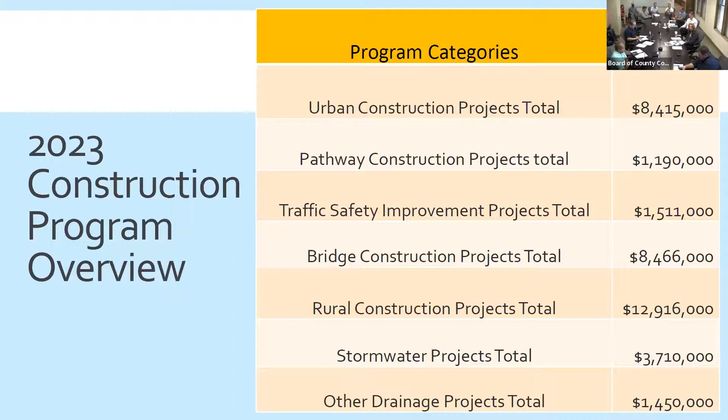This is our major construction projects. You can see Bigelow Gulch there at the top of the list. We're a little excited to get the last phase going and get the corridor completed, a project we've been working on for a very long time. The other bigger projects, we have the West Terrace Stormwater project that's going out right now, slated to start work on the first phase next week on Monday, the 17th. That number is the actual construction amount for that phase. There's different numbers, some include all the right-of-way dollars and everything else, but that's just strictly the construction number. You can see the Little Spokane Bridge is also going out next year, along with Brooks Road, Euclid Road Bridge, which we hope to get going on very soon. We're just working through a lot of the permitting with BNSF. Then some other preservation and a roundabout project up on 57th are kind of the highlights for next year. Next slide.

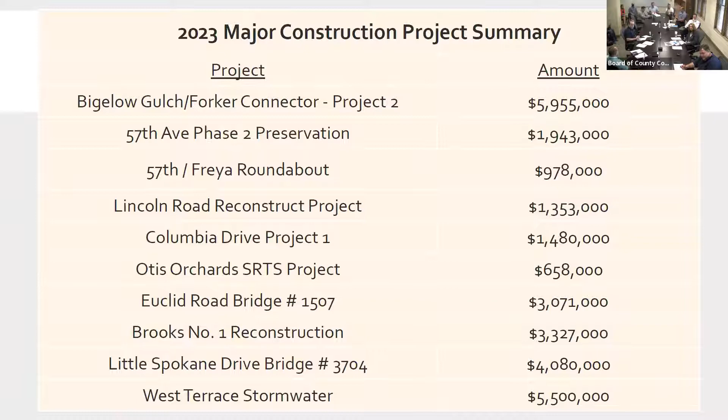Now we'll get into a little more detail on some of the projects. This is Bigelow Phase 2. It's on the west end connecting into our Bigelow Phase 1 project, very near the city limits down at Francis. On the east end, it ties in at Weile and the current Bigelow Gulch project. We're straightening out a lot of curves and fixing a lot of elevation changes through there. It'll be a very welcome change, making that corridor much quicker and safer for people to be traveling. Next slide.

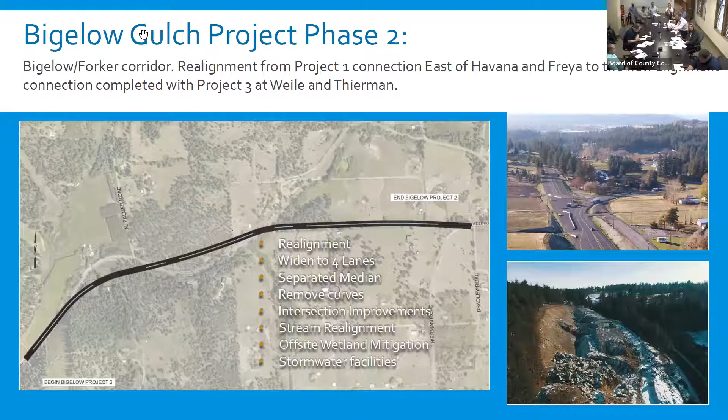This is the breakout of the funding and also our anticipated schedule for the project. You can see we have funding from a bunch of different sources, and the one thing I'd like to point out is we only have 1.1 million of county dollars out of a total project cost of 15 million.

This is what Kyle was talking about. We had a lot of right-of-way costs and a lot of other costs associated with this project, so it's a pretty good sized project. Construction's pretty good size too.

So the schedule down below, you can see we're trying to get our documents out and go to bid in early January, with an anticipated construction start in the spring, and then we'd like to have it open to traffic in 2024 as the goal.

I just wanted to add a few details to that. We are going to have that out early to go next year, but we're still doing a big analysis on the sequence of work and the total allotment of days for that project, trying to consider all the impacts beyond just building the roadway to the neighborhood down there and the wetlands restoration and reconstruction.

Looking at exactly when we shut down the current portion of road to begin that reconstruction is something we're looking at. There's so much other work to be done. We're just trying to minimize the total duration that road is out of service, because 2 years is a long time to have that completely off, which would drive a lot of traffic to some of the neighboring north-south streets. So it's possible we don't even hit the major realignment until '24 and do all of the ancillary work in '23, so that we're ready to just build and have it only shut down for one season.

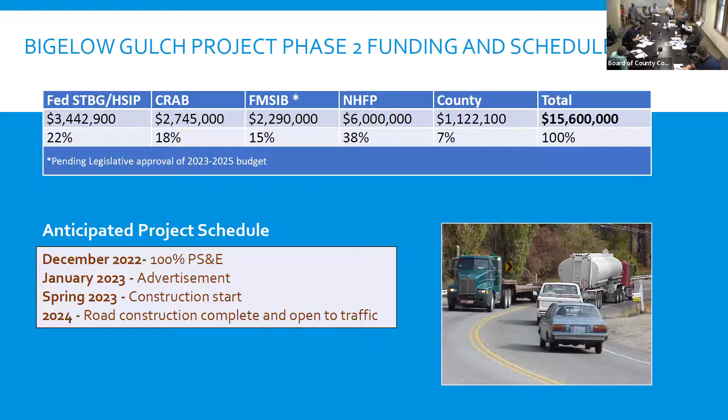There's a lot of offline work that can be done on that project without actually closing the existing Bigelow to traffic, and obviously that's in everybody's best interest to minimize the amount of inconvenience. So we'll see, more to come on that. All right, next slide please.

You can see there the TIB portion of it and the county portion. We're about 20% of that project in terms of construction dollars. And again, that's a spring ad, and then also hoping to have that open to traffic by fall if possible. Next slide.

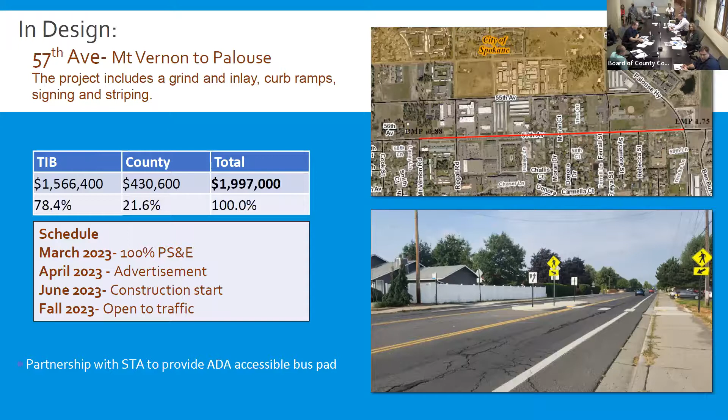And this is just the roundabout I was alluding to. Again, you can see that the construction schedule matches up with the 57th Avenue preservation project, just trying to get it all done at once so we don't have to inconvenience people more than we are already going to be doing.

On the dollars, you can see that's a CMAQ grant, an air quality grant that we got. And you can see that we were 40% in that one, so a little more than usual, but it's a good project. We're excited about it.

There is a right-of-way that's ongoing right now. The only property we needed to acquire was at the northeast corner there from a church, and we've been meeting with their board and having conversations with them. So hoping to get that right-of-way soon, since there's only one owner we have to talk to. But more to come - we actually own the southeast corner, and then we're staying off the western parcels by moving the roundabout to the east a little bit.

So is it just stop signs for the north-south traffic then? Yep, it's a through movement for east-west and stopped north-south, and the volumes are growing.

With different activities and attractions, the aquatic park to the south on Freya, we're getting a lot more pedestrian activity and a lot more just general traffic on Freya.

And this will also kind of marry up well with the city's project. They're putting a roundabout also where they have a grant, and I'm not sure if they've acquired it yet, but up at Palouse Highway and Freya. So this will all kind of make that area come together nicely and be a much better improvement for traffic overall.

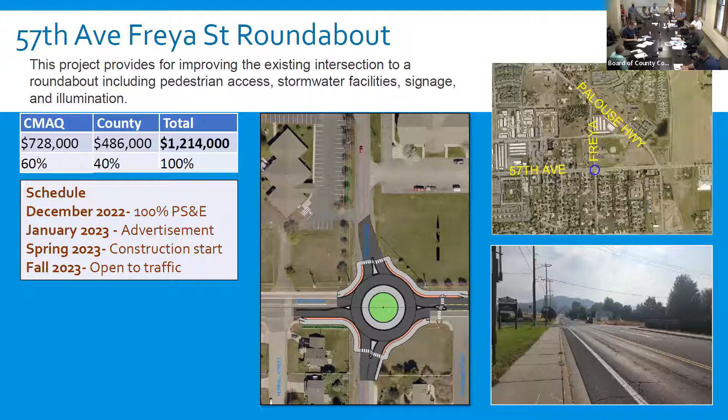You can see, because it was a take it or leave it type project, and we wanted it done. We really need to do something with Lincoln anyway. We were going to be out there doing preservation work, so why not get the improvement for roughly the same dollars on our end? So we're happy to get that one.

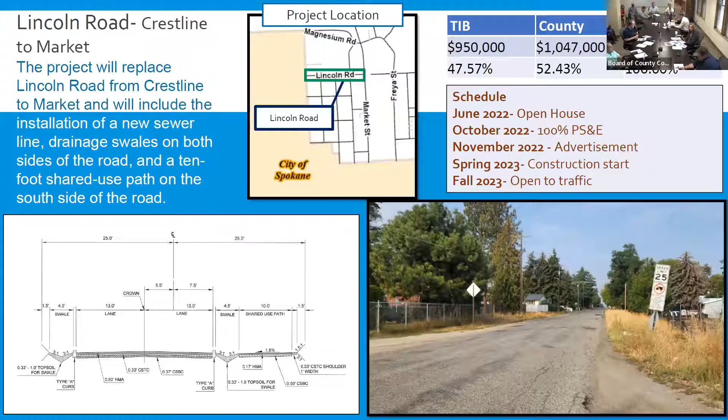And Columbia Drive, we're calling this Project 1—it's actually the second project. If you're familiar with Columbia, it goes through the Northwood neighborhood. We had built the eastern portion from Argonne over to Northwood, and now we're going to be doing the other portion of it from Northwood back to where the new neighborhood took off. I'm not sure what street we'd call that exactly.

You can see it, it's a red line on the map there. Again, I'm going to get this out in the spring and hoping to have it built next year. There are some mild traffic calming improvements we're making, similar to the previous phase—some curbed islands you can see in the cross section below. They just occur at a few locations, trying to slow traffic down.

We've heard from the neighborhood up there that people tend to really move through—it's a very wide roadway now. We put in striping and that helps, but I think the channelization will also serve to slow folks down a little bit. Kind of an interesting thing.

We've heard from people that the really rough road conditions that exist do help calm traffic, so they're concerned that when we repave it, people are going to drive even faster. And I don't actually doubt that, I mean we see that. So hopefully with the improvements we'll offset the new asphalt effect of people driving quickly, and that'll be a good improvement for the neighborhood in there.

That'll complete all the asphalt clear from Thierman all the way to Argonne, so it'll be a pretty good roadway at that point for us. That's all county dollars—this was actually shift money that we got from the board. So we're excited to do that project.

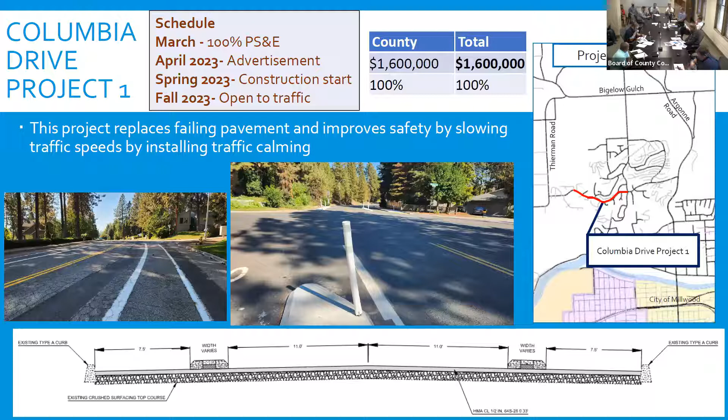That'll be a really good one that never fared very well in the grants world, because of the classification of road—the overall traffic doesn't compare to our larger arterials—but still a really good project. Happy to have it. Next slide.

We did get some money. You can see a 92% grant from Safe Routes to School for Otis Orchards. This is a crossing project right by a school, and you can see we're adding flashing beacons, narrowing the crossing by doing some bulb outs. We'll also have this one going out next year, and obviously want it open before school starts.

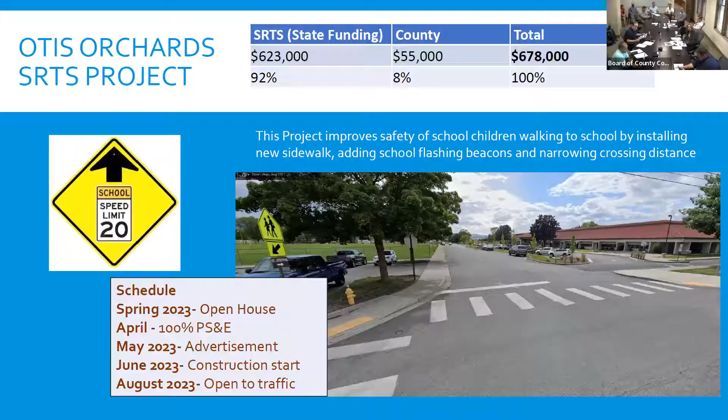This is just a diagram showing what they're proposing. You can see along the north side of Wellesley there, we're doing the pathway, and then you can see the bulb outs at the intersection there in front of the school with the new crossings and the beacons.

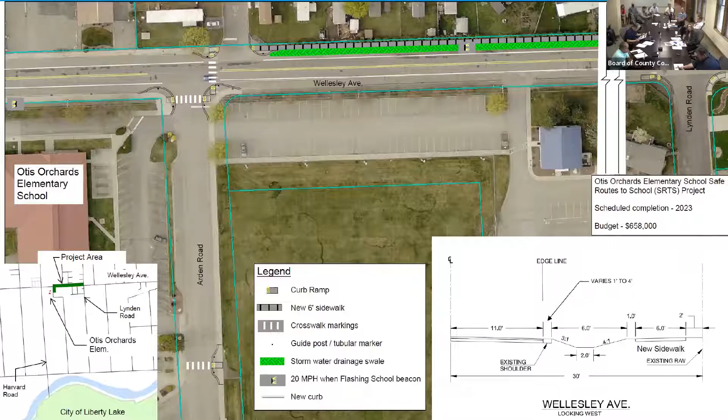Euclid Road Bridge. I think we've all heard plenty about this one. We're really happy to have it underway and like it going as soon as possible. We've been leaning on the railroad as much as you can lean on a railroad, and hope to be underway soon. We've been getting favorable comments back, so that's one we'll keep pushing on and hoping to have it done fall 2023 and open to traffic. We're anticipating maybe having around $1 million in county money in there, depending on how construction goes. And then we have the 2.6 from Burlington.

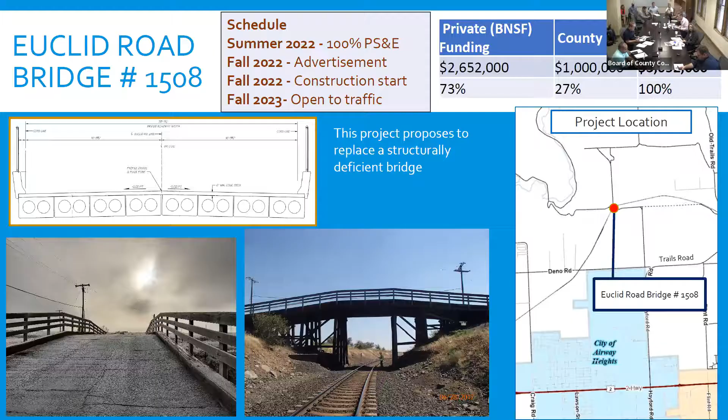Brooks Road. This is a reconstruction project for us. You can see we got the STP money in there for roughly half of it, RAP for roughly a quarter, and then about only 15% county dollars.

If you're familiar with Brooks Road, it's a really good connection from Highway 2 down to Medical Lake. We have two phases of this. Due to funding, they're going at different times, but we're going to build this southern portion next year and have it open in the fall. That'll be a really good project. It's a very narrow rural road and really in need of something being done, so the preservation work along with the widening work will be a really big improvement. It'll open it up for other folks too that want to use it for walking and biking. I could see there might be that need if there were actually the facilities available to people.

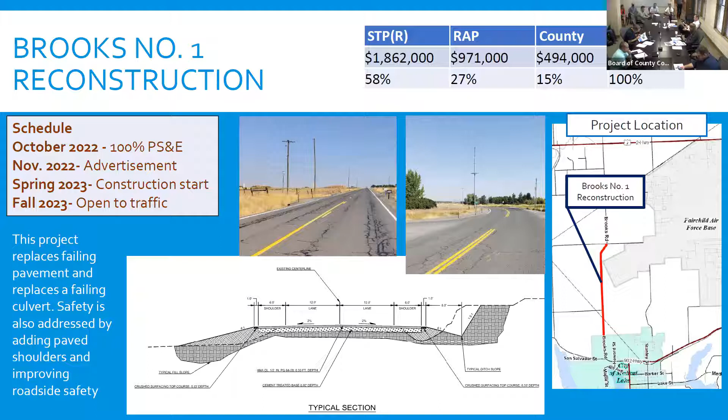Little Spokane Drive Bridge. If you're familiar with Little Spokane up there, this is the piece going out to Woolard, and it's due. This is federally funded—you can see 72% federal contribution on that. Again, we're hoping to have this open by the end of construction season next year.

The only challenge with this one is the detour route is relatively significant and could also conflict with what WSDOT has going on. They're doing some intersection safety improvements too, so we're coordinating closely with them to try and minimize the inconvenience to the public, and see if there's any opportunity for timing ours. We don't know that there is. We have certain windows we have to work in, so we're somewhat restricted, but at least we'll explore the opportunity and see if we can.

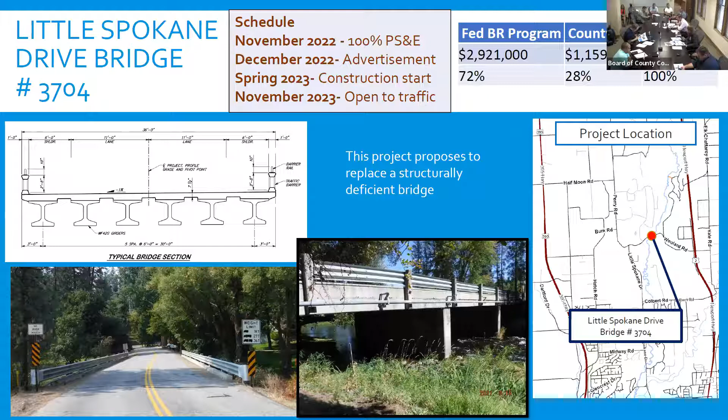As we discussed, this is our West Terrace Stormwater project. Phase one of it is putting in the big main from Hayford and Arrow and moving it south to get down towards the neighborhood we're trying to pick up. That's going to be underway starting next week, and we'll see how far they get. If it keeps being summer forever, they'll probably get quite a ways. If winter actually shows up, then they will have to shut down for the winter, but at least we'll start making some headway on it and breaking ground.

That'll be a really good improvement. The line we're putting in has capacity anticipated not just for what's going on now, but also to facilitate future growth in the area. We all know in this area, the only real solution is to get the water out of the area and find some place to dispose of it, and this will facilitate that work.

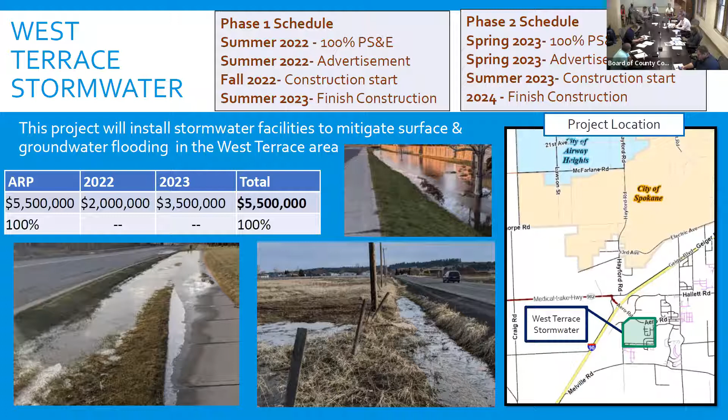We're happy to have this project, paid for primarily by ARP funding, so we're very appreciative of that. We do not have another funding source for stormwater projects like that. We can always find money for water quality improvements, typically through ecology, but not so much for conveyance projects like this one. So it was really, really good for us—we really appreciate that money.

So that was primarily focused on next year's program, the 2023 improvements. And we also have the 6-year plan. If you have an opportunity to look at it, I'd encourage you to do so. We have a lot of really good projects programmed going forward.

We're taking a look at other potential corridor projects with Bigelow getting to the end. We're looking broadly at the area to see if there's other corridor type projects that might be of interest. We don't know that there is. Our area has a lot of topographical challenges—you cross giant ravines, go up and down mountains, have wetlands and rivers. So other corridors like a northwest connector have a lot of challenges, but we're going to at least take a look and see if there's something worth pursuing. If we decide there's something worth looking at, we'll bring it to the board and get everybody's temperature on what they think might be worthwhile.

The other thing we always bear in mind is that it's a big drain on the program for an extended period of time to attack those corridor projects. So it's always a good conversation to make sure we're willing to commit to them for the long haul, because they can easily be 10, 15-year projects and detract from our ability to do other work—similar to what we've seen with WSDOT and the NSC not being able to do some of the other work they might like to be attacking. So we want to go into it with our eyes open and make sure there's support and that it's something we all want to pursue if there is one that makes sense. More to come on that—just foreshadowing at this point.

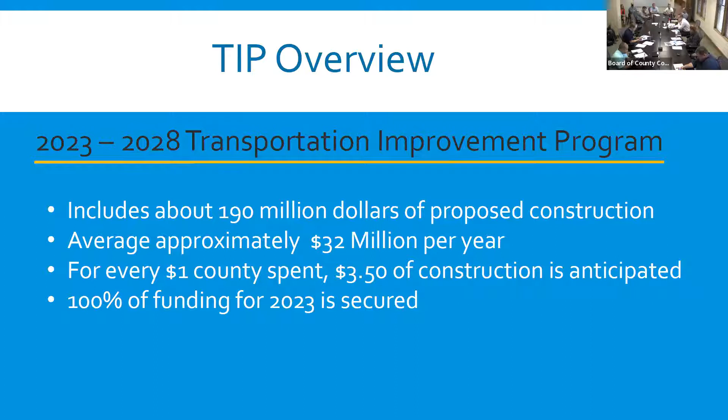Next slide. A little hard to see, but I wanted to show the board the geographical distribution by district of the projects—you can see they're kind of all over the map. This will be something we'll be looking at every year going forward, and I anticipate more interest in this. But it's been a really good year.

Our grants group, I just can't say enough good about them. They do a fantastic job of securing funds for us. That's Jamie Hayes and Barry Green, and they really are good at going out and finding the money and getting the grant applications all shined up, getting us the money we need to do the work. So really appreciative to that team for their efforts. And I think that's it.

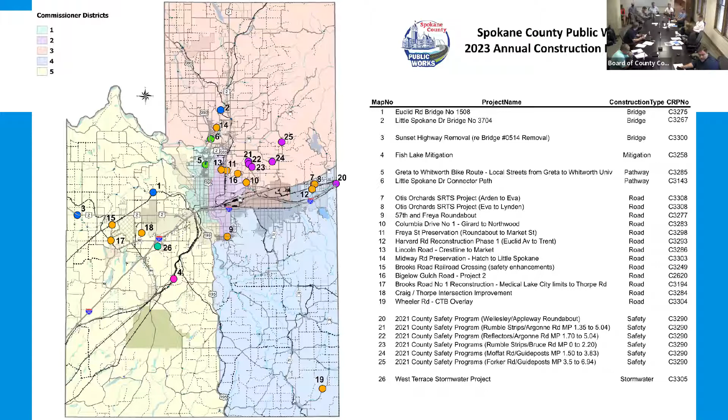Something that's gonna take us to Kirsten. That's great response. Got the chair warm. That's always nice. You wanna roll right into the next one? You gotta jump there, you only get so much time. Matt and Kyle, you guys gotta check, you're already using the 5-district map. It is the 2023 TIP. There you go. Already thinking ahead. It's funny, there's no dots in the middle.

Okay, so this is the other half of Public Works here, primarily on our wastewater system. Kristen is going to brief the 6-year CIP. Sounds good. Good morning, everybody. Our 6-year sewer CIP covers the wastewater collection system, Riverside Park Water Reclamation Facility, as well as our county water reclamation facility. So I'll briefly cover all 3 of those in this presentation.

Next slide. Starting out, I wanted to give you a brief overview of our wastewater collection system. These 2 maps are in the CIP—one is the valley, the NVI and SVI basins, and the other is the NSI basin, our north side. On those maps, starting with the valley, we have 2 major interceptors that run through the valley, the NVI on the north side and the SVI on the southern portion. Both collect throughout the valley and feed the Spokane County Regional Water Reclamation Facility, shown on the left, SCRWRF.

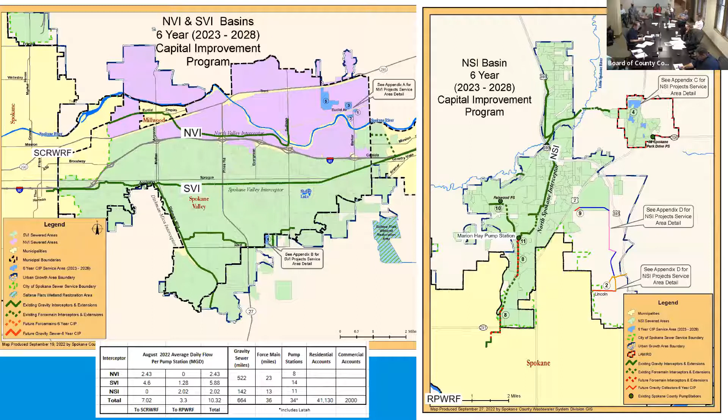Those are just kind of overviews of our system. We do see about 2 million gallons a day of flow from the north side of Spokane, another 2 million gallons a day from the North Valley Interceptor, and then about 4 million gallons a day from the South Valley Interceptor, just to give you an idea of the flows.

This is a summary from the CIP again of our wastewater system improvements. I'm going to touch on the projects that we have coming up in 23, 24, and 25 that are all highlighted as our first projects there in the CIP. Of interest, we have about $26 million of projects planned for the next 6 years covered in our CIP. That's both our capital improvement projects as well as our operation and maintenance projects associated with, for instance, like our pump stations.

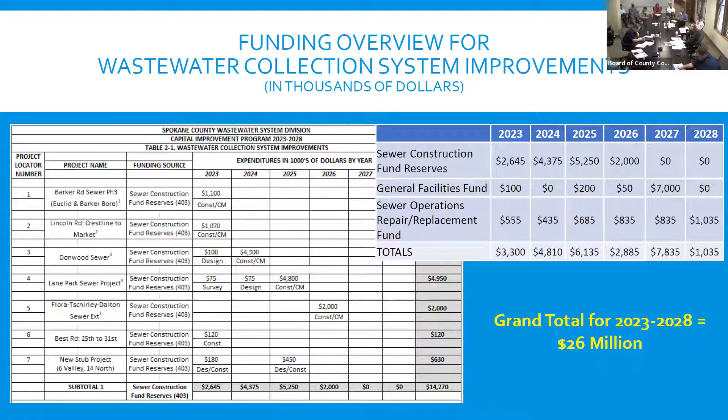These are projects in the valley. There are 3 upcoming projects in the Barker Road area. We will be coordinating all of them with the valley as they participate in the road portions of the projects and we do the sewer. This year, in 2023, we're going to finish out a project on Barker Road. In 2024, we're doing a sewer project, a continuation of our STEP program, septic tank elimination projects, where we're replacing septic tanks in Donwood, both in the north portion and south portion there, right adjacent to the river. And then further out in 2026, close to the new Amazon facility, is a project we'll do on Flora, Tschirley and Dalton to provide sewer to that area, which in essence will complete sewering the northeast industrial area, as the valley calls it.

Now I'm going to give you a few more details in the following slides on these projects.

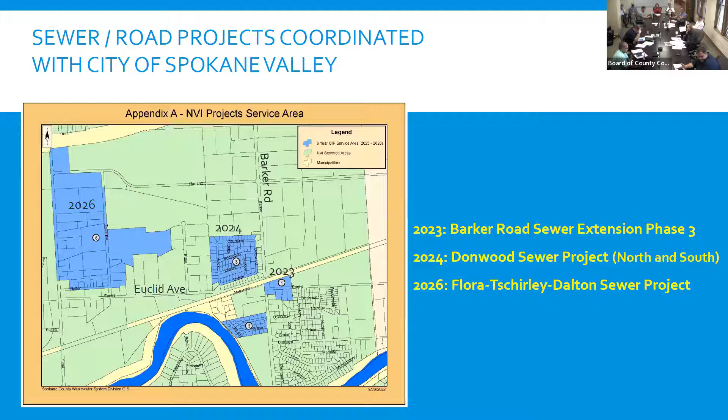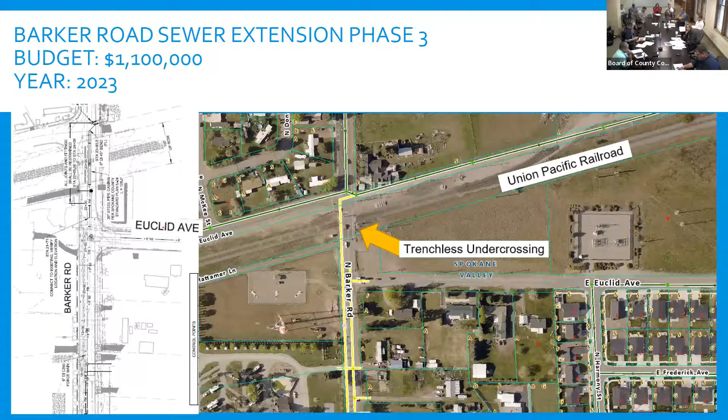This is the Barker Road project. We've completed phases 1 and 2, and this is phase 3. We're going to be boring under the Union Pacific Railroad with our sewer, putting in gravity sewer as well as a force main, running some additional sewer on Euclid Avenue. The valley is going to be doing all of the road work associated with this project. Next slide.

This is the north half of the Donwood Sewer project. You can see on the left there, it's a tight community subdivision, with approximately 90 parcels. They're all on septic tanks right now. We're gonna go ahead and put sewer in this neighborhood and take them all off of septic tank.

We are also pursuing CDBG grant funds to help with the connections to sewer in this area, as approximately 35-40% of them are low income. When the project's complete and they're required to connect to sewer, they can go ahead and use these CDBG funds to help pay for their connection costs and their side sewer construction to complete the connection to sewer.

So I know we did that with the first phase, and how did that go? It went really well. We teamed up with the valley, and the CDBG funds come from the valley. They secure those and then dedicate those towards our project. It worked quite well. We had a good turnout from both paying. They have 2 different fees they cover. They cover the assessments that we charge to connect to our sewer system, and then they also cover their side sewer construction costs. And it works well. In fact, we're meeting with the CDBG board later this week to talk about it for this project.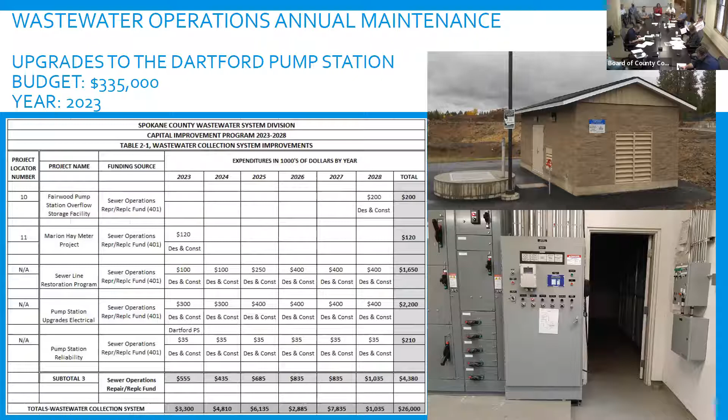Now we're moving on to the Riverside State Park Water Reclamation Facility. The county owns 10 million gallons a day of treatment capacity from Riverside State Park, and every year we pay the city a prorated portion of our share of costs to send our flows to this facility. The fees are estimated at approximately $500,000 per year. They were larger in the past because we were helping pay for the membrane upgrades that were done, but those projects are now complete.

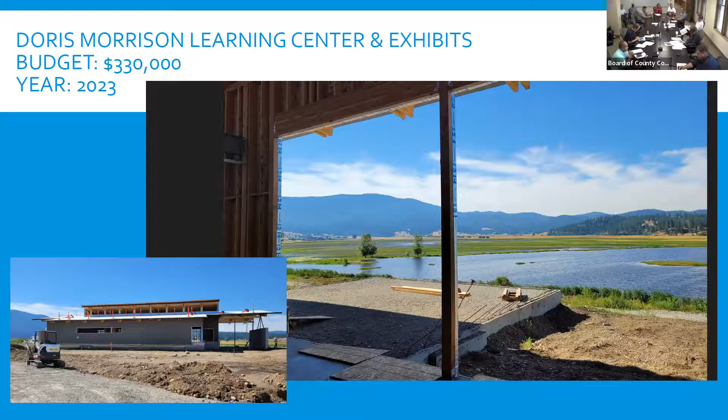And the last slide is a shot of the Doris Morrison Learning Center. It's currently under construction and forecasted to be complete in April of 2023. This is the funding associated with completing that construction, and this concludes the presentation. If you have any questions, I'm happy to answer them. Thank you, and I appreciate the opportunity to share this with you.

You've really made some progress on the Doris Morrison Learning Center from when we were out there. Yeah, doesn't that look nice? It's coming together, hoping for spring. It's great that it's right on the Central Valley campus as well. All right, thank you. Thank you, have a nice day. You too.

Is yours miscellaneous, or are you doing that? Something miscellaneous. Okay, we're a little early, but we'll go ahead and move on. Everyone's got it today. Good morning, Commissioners.

Thank you for the opportunity to share with you what is going on with ARP. We closed the affordable housing category on September 28th, and the selection committee reviewed that and is in their final stages of compilation. This particular category, we're doing an additional review because there are other funding sources in that affordable housing arena, and we want to make sure our recommendation is braided with those funding sources as well. So we'll be doing that work this week, confirming it, and depending on where that lands, putting it on an upcoming consent agenda. There's 2.4 million in that category right now, and there may need to be a small amount added, or depending on how some of these funding sources play out, there may not need to be any.